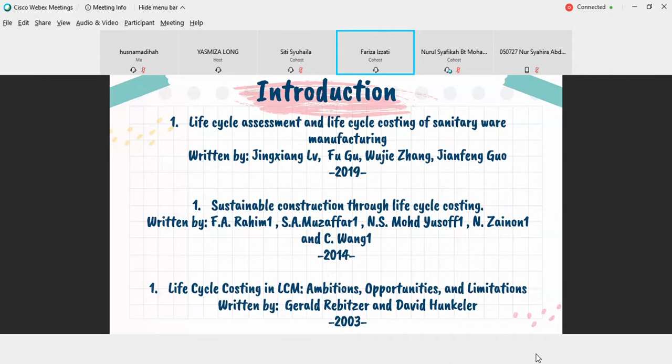Okay, so for the introduction, what is life cycle costing? Life cycle costing or whole life costing is the process of estimating how much money you will spend on an asset over the course of its useful life. Whole life costing covers an asset's cost from the time you purchase it to the time you get rid of it. And then buying an asset is a cost commitment that extends beyond its price tag.

For example, think of a car. The car's price tag is only part of the car's overall life cycle cost. You also need to consider expenses for car insurance, interest, gas, oil changes, and any other necessary maintenance to keep the car running. Not planning for this additional cost can set you back. And then the costs to buy, use, and maintain a business asset add up. Whether you purchase a car, a copier, a computer, or inventory, you should consider and budget for the asset's future costs. Next.

What is the purpose of life cycle costing? Life cycle costing (LCC) is an important economic analysis used in the selection of alternatives that impact both pending and future costs. It compares initial investment options and identifies the least cost alternative for a 20-year period.

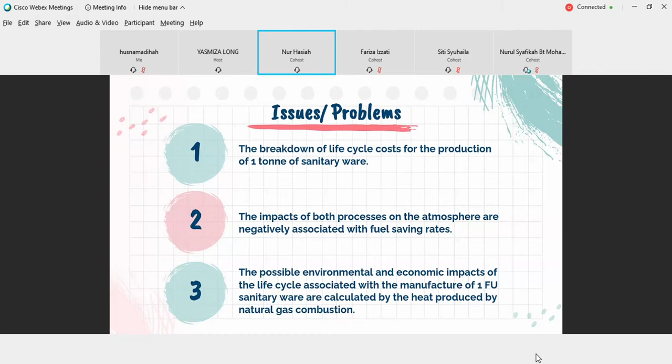Thank you. Okay, next, the issues or problems of Article 1. The first one is the breakdown of life cycle costs for the production of 1 ton of sanitary ware. Second, the impacts of both processes on the atmosphere are negatively associated with the fuel saving rates. Third, the possible environmental and economic impacts of the life cycle associated with the manufacture of 1 FU sanitary ware are calculated by the heat produced by natural gas combustion. And the last one is both waste product and gypsum recycling rates are negatively associated with the overall environmental effects.

Okay, I will explain the findings for Article 1. First, the result found that in the breakdown of life cycle costs for the production of 1 ton of sanitary ware, over 20% of the overall cost are the managing costs and sale costs. Materials and energy also account for 16.30% and 13.26% of the total cost, respectively, while the proportion of the equipment, construction, labor, maintenance, transport, and tax costs to the total cost are less than 10%.

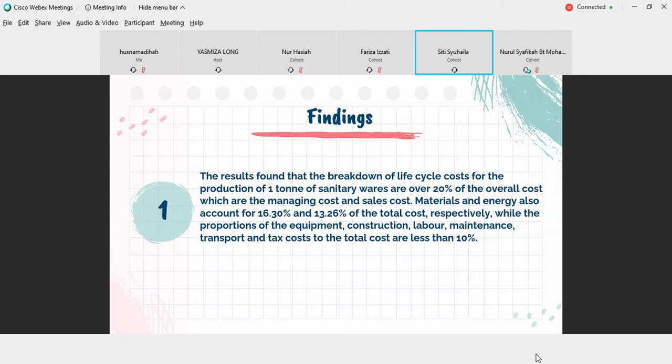Next. Second, a detailed contribution analysis is performed to identify the contribution of each involved process. The firing process makes the greatest contribution to all the selected impact categories and accounts for 17.82% of the total equipment cost and 37.25% of the energy cost. The high environmental impacts and energy costs can be attributed to the use of coke oven gas. The raw materials used are also responsible for environmental impacts, where quartz has the highest percentage, followed by kaolin, the plaster of Paris, and cardboard boxes respectively.

Lastly is sensitivity analysis. First, fuel saving. When the consumption of the coke oven gas is reduced, the environmental burdens are also decreased. Second, natural gas. With the increasing use of natural gas, the environmental burdens of all indicators are decreased. Lastly, recycling rate. With increasing recycling rates, the environmental burdens of all indicators are decreased. Next, I will pass to the next presenter.

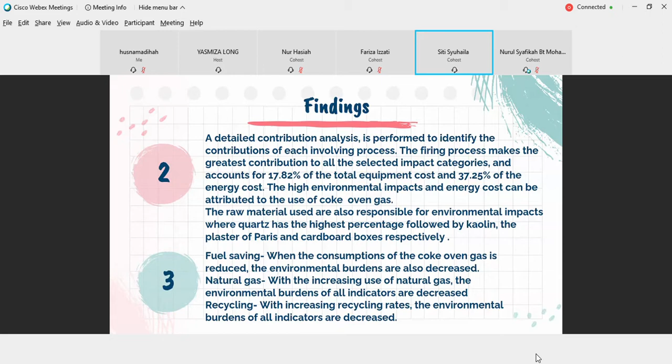Next is implication for Article 1. First, based on Article 1, this article is more focused on life cycle assessment rather than life cycle costing. In this article, life cycle costing results show that casting, body preparation and firing are the greatest contributors to the total equipment, material and energy costs respectively.

Second, in this study, life cycle costing and life cycle assessment share the same system boundary. The traditional life cycle costing is adopted. Two types of costs are included: capital investment and operational expenditure. The former category includes equipment and construction costs. The latter one contains purchasing and manufacturing expenses, management costs, transportation and sale expenses, as well as tax. Next,

third, in life cycle costing, managing costs and sale costs are primary contributors of the overall cost, followed by material costs and energy costs. In this case study, using more environmentally friendly fuels such as natural gas reduces the environmental burdens of sanitary ware production. Yet, the use of natural gas requires additional costs, even when carbon tax is considered in life cycle costing.

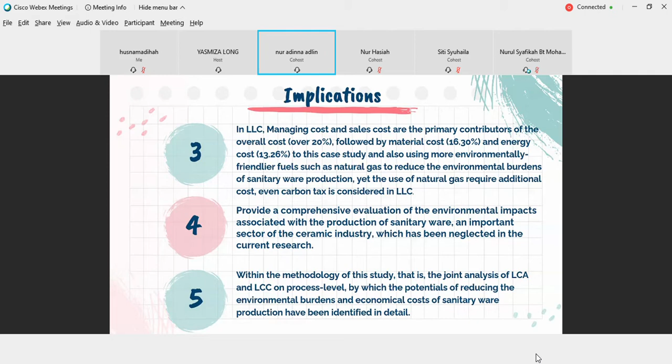Okay, now let's start for the suggestion. First, for industrial practitioners, the use of green and sustainable materials should be encouraged because the environmental burdens associated with the raw materials, more precisely their extraction processes, cannot be mitigated by improving processes and equipment or switching to cleaner energy sources. Improving the energy efficiency is a potential route to minimize the environmental impacts of the key processes in sanitary ware production, namely firing and drying.

Improving the recycle rates of wasteware and gypsum can be another viable option to reduce the environmental impacts and economic costs. Using natural gas to replace coke oven gas can diminish the environmental impacts, and the results of the sensitivity analysis prove that it might be more effective than fuel saving. Next.

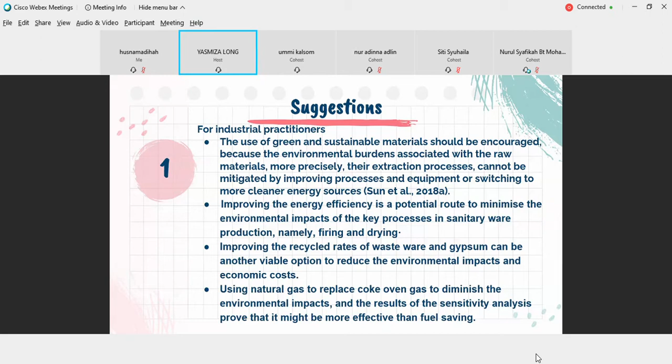Second, for administrators, environmental impacts can be reduced by increasing energy efficiency. The government should encourage the ceramic manufacturers to improve their energy efficiency by reducing tax or providing subsidies to facilitate the installation of production equipment with high energy efficiency. Replacing coke oven gas with natural gas can reduce environmental impacts but increase costs by 13.8% even considering the carbon tax. This may impede the use of natural gas.

The government should make policies to guide sanitary ware manufacturers to expand the use of natural gas, and measures such as increasing pollution tax for the ones that still consume coke oven gas, and providing subsidies to those that use natural gas can be considered, as well as the installment of environmental protection equipment, which aims at constraining emissions from the combustion of coke oven gas such as sulfur dioxide, nitrogen oxides, and particulate matter generated. Okay, now I will pass to the next presenter.

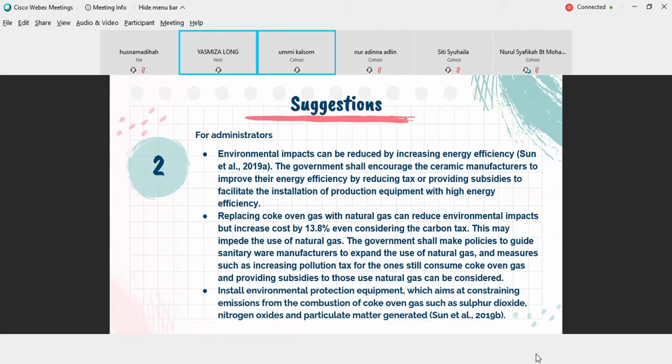I will present about the conclusion of Article 1. Okay, based on this article, this research made two major contributions. Our first contribution is to provide a comprehensive evaluation of the environmental impact associated with the production of sanitary ware, an important sector of the ceramic industry, which has been neglected in the current research.

Secondly, the second contribution is within the methodology of the study, that is the joint analysis of life cycle assessment and life cycle costing on process level, by which the potential of reducing the environmental burden and economical cost of sanitary ware production have been identified in detail.

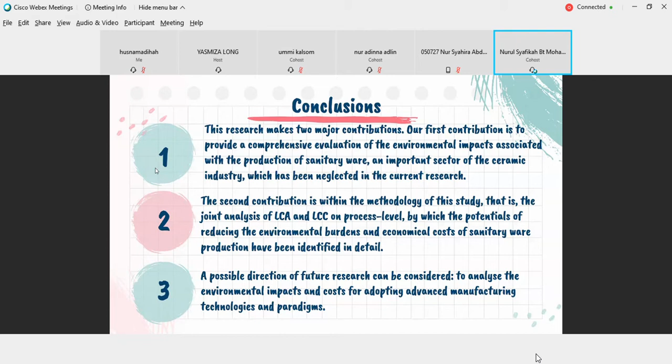And third, a possible direction of future research can be considered to analyze the environmental impact and cost for adopting advanced manufacturing technologies and paradigms. Okay, I will pass it to the next presenter for the detail of Article 2.

Thank you. Okay, so the Article 2 is about, okay, this is the title of the Article 2. Next. Sustainable construction through life cycle costing. Next.

Sorry, sekejap lekat. Okay, never mind.

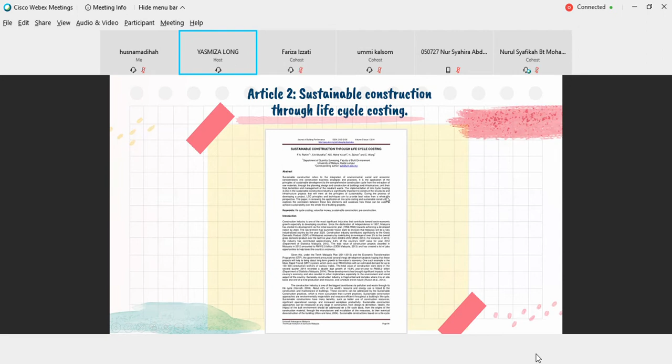Okay, so the introduction of this article is about how the construction industry is one of the most significant industries that contribute towards socio-economic growth, especially in developing countries. And then life cycle analysis considers all the input and output of acquiring, owning, and disposing of a building system.

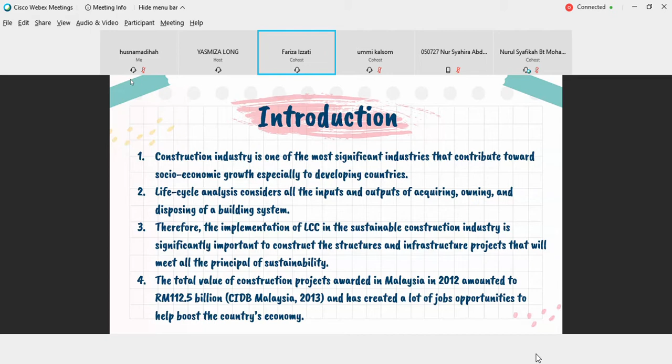And then the implementation of LCC in the sustainable construction industry is significantly important to construct structure and infrastructure projects that will meet all the principles of sustainability. The total value of construction projects awarded in Malaysia in 2012 amounted to 112.5 billion (CIDB Malaysia 2013) and has created a lot of job opportunities to help boost the country's economy. Next.

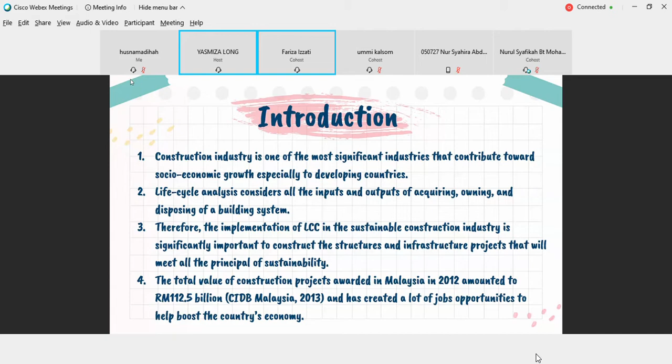The purpose of this article: the first one, to achieve sustainability over the whole life of a building project between life cycle costing and sustainable construction. The second one, to improve building sustainability performance. The third one, to integrate environmental, social and economic considerations into construction business strategies and practices. Next. I will pass to the next member. Thank you.

The issues of the article: first is energy, pollution and climate change. More than half of all resources consumed globally are used in construction, and 45% of energy generated across the world is used to heat, light, and ventilate buildings, with a further 5% arising from constructing them. Second, materials and waste.

The amount of construction materials wasted on site is relatively high and equals 9% by weight of the purchased materials. Third, water supplies. Water supplies are a growing cause for concern for the construction sector, which has particularly high requirements, especially in the manufacture of materials such as steel and concrete. Next.

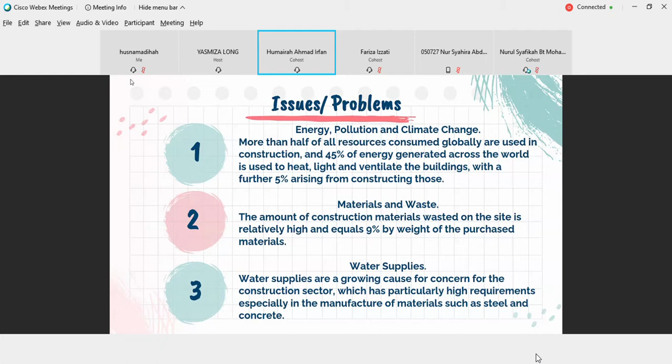Fourth, skill. Upskilling employees, the supply chain and the local community can have a positive impact on the sustainability of a business and community, such as greater employment, job satisfaction, and business productivity.

Corporate responsibility. The construction industry has been slow to respond to corporate responsibility, but increasing regulation in areas such as carbon emission and waste are forcing companies to improve their processes, and many clients are beginning to demand a responsible approach to design and construction.

6. Existing stock. The methods used in the construction phase of refurbishment as well as their end use have impact on their sustainability. Next. 7. Sustainable procurement. The procurement of goods, services, and buildings has traditionally been based on two overriding considerations: price and quality. However, the choices people make about what they buy can have a huge impact on all aspects of sustainable development.

Lastly, sustainable community. Social aspects are often missed out of the construction industry's consideration of sustainability, despite the important effect that they have on long-term value for money and the well-being of building occupants. Next.

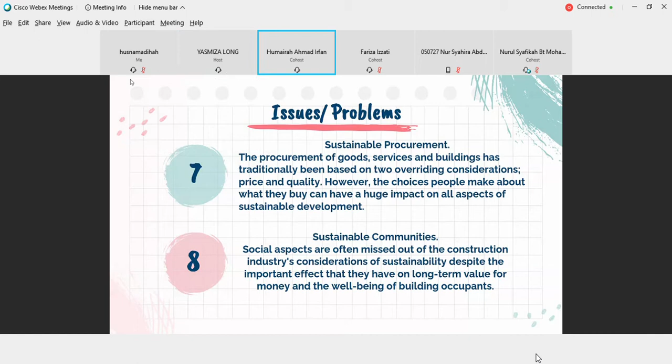Okay, this is the finding from Article 2. From Article 2, the study found out that life cycle costing is effective in many areas of the construction industry and can be used at different stages in the life of a building project.

It showed that the application of life cycle costing at design stage was chosen as the most influential factor on construction project value. After that, it was followed by the teamwork factor in the preparation of life cycle costing at design stage. Teamwork refers to the relationship between each party in the design team and the client.

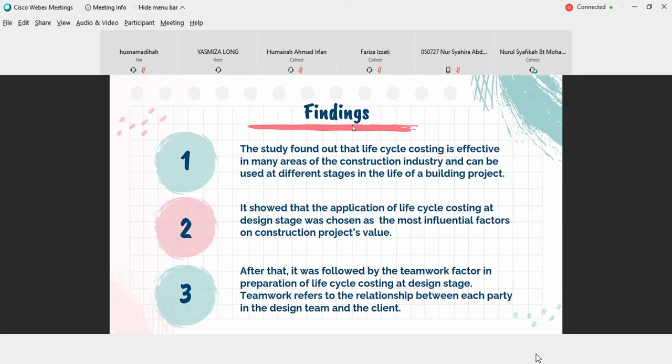And lastly, the integration of life cycle costing might facilitate collaboration between organizations throughout project design and construction. Especially, life cycle is considered as an influential technique in the construction industry. Okay, we'll pass it to the next presenter.

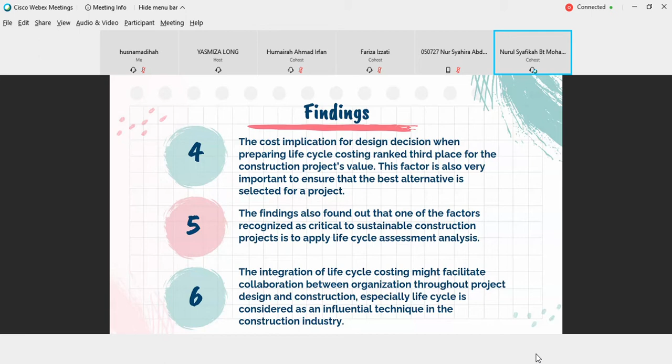Okay, now I will talk about the implication for Article 2. First, sustainable construction brings additional value to projects. Life cycle costing practices are used to ensure that this value is maximized. This means creating visions of new direction and obtaining objectives towards a base of desired output, including formulating policy.

Second, the significance of life cycle analysis can distinguish needs from wants. Thus, the fundamental objective, sustainable construction, can be collaboratively shaped and achieved successfully. Third, the enhancement of living economic standards while increasing the overall quality of life for present and future generations.

Life cycle costing can generate significant savings in initial installation and operating costs. It is also one of the best techniques for producing best results in achieving value for money for the client. Next.